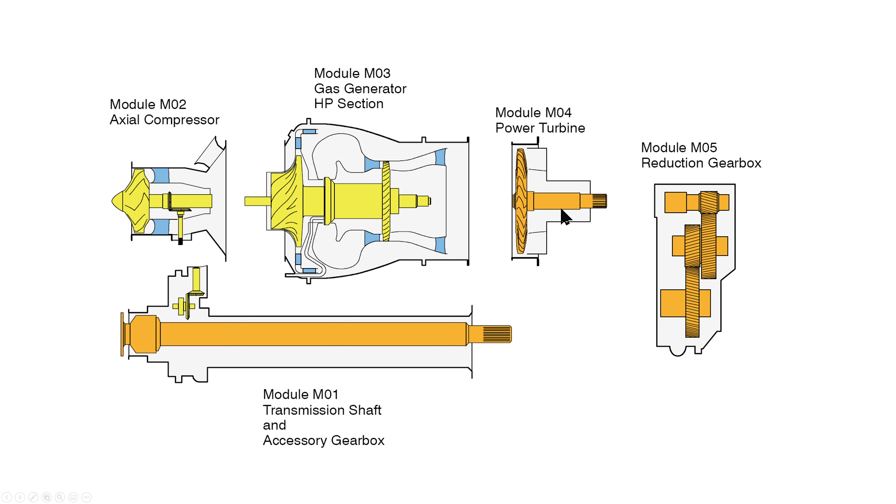The air that flows through here also goes to the 1/3, 2/3 rules. So 1/3 of the air that flows through this engine is used for the fire. The other 2/3 is used for cooling and pressurization and all kinds of other stuff.

So this is the bleed valve. When you've got your VEMD page up and you've got those white and green diagonal line boxes in the top left and top right corners, those are called your bleed valve flags. At startup, your bleed valve flag should be indicating that this bleed valve is open.

That means that some of the air that is pulled in by the axial compressor is not used - it's not sent back here at all. It is vented overboard; the engine does not use it. So that bleed valve is open so that the engine only receives the air that it needs.

But if the engine needs a high power demand, that bleed valve will close and extra air will be supplied back there to really ramp up the fire. But during engine start and for most of the operation in a D2, these bleed valves are going to be open.

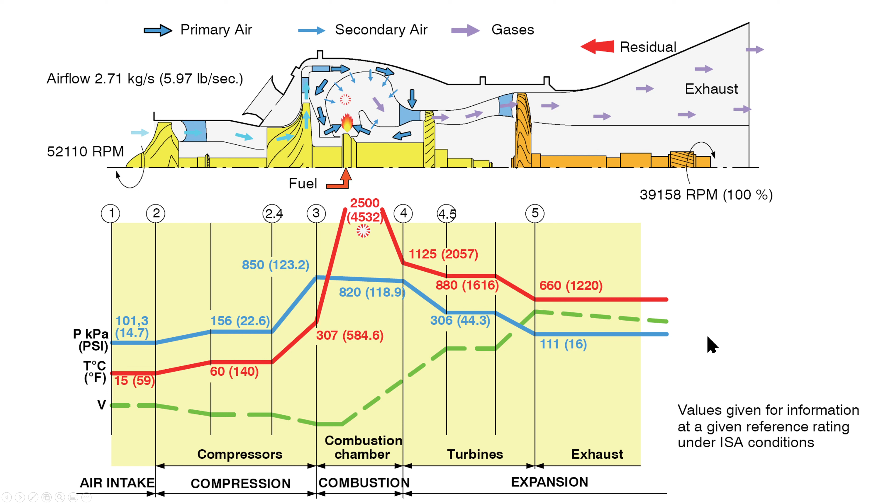We do have a little bit of residual thrust because you can see here that air is boogieing when it comes out of the back of that engine. So there's a very, very small amount of residual thrust that is created.

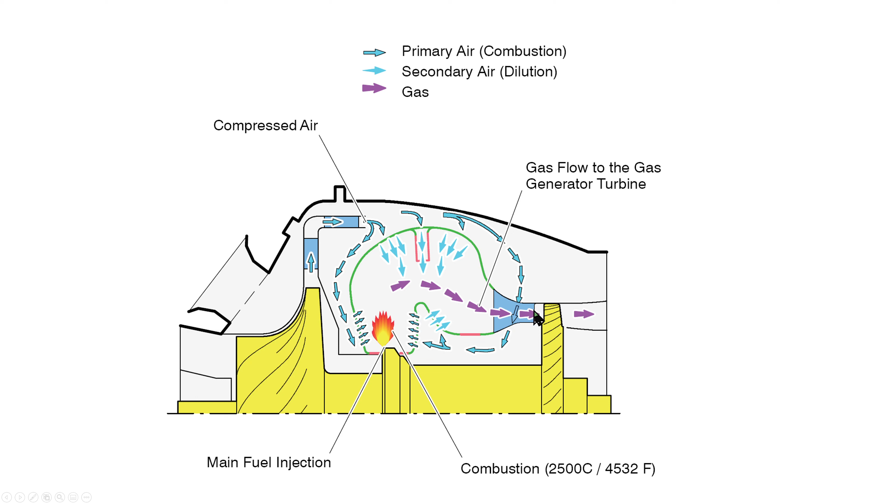This goes into a little more detail on the inside of the engine. We have our primary air that comes down here and feeds the fire. The secondary air flows in all along here and dilutes that air. And there you can see that primary air flowing through the inside of that stator.

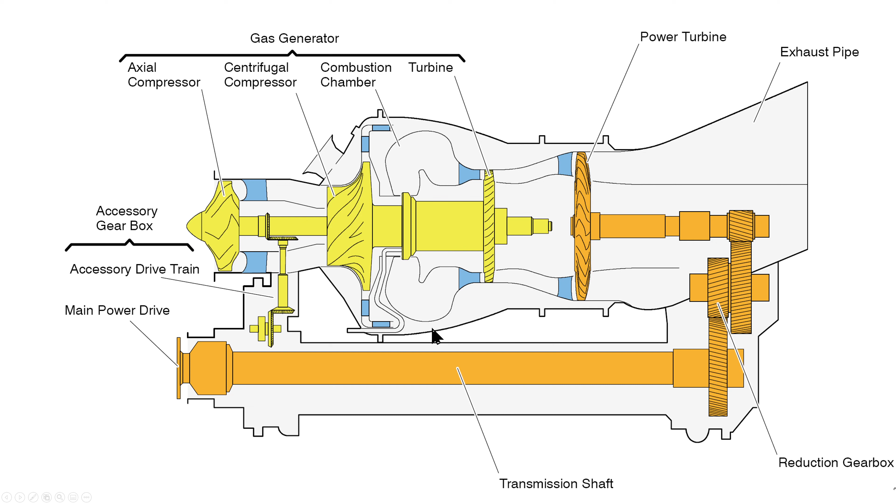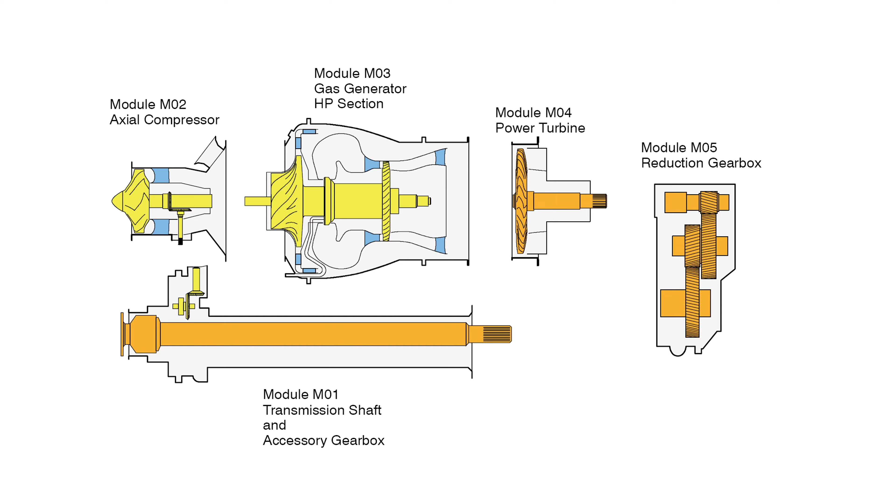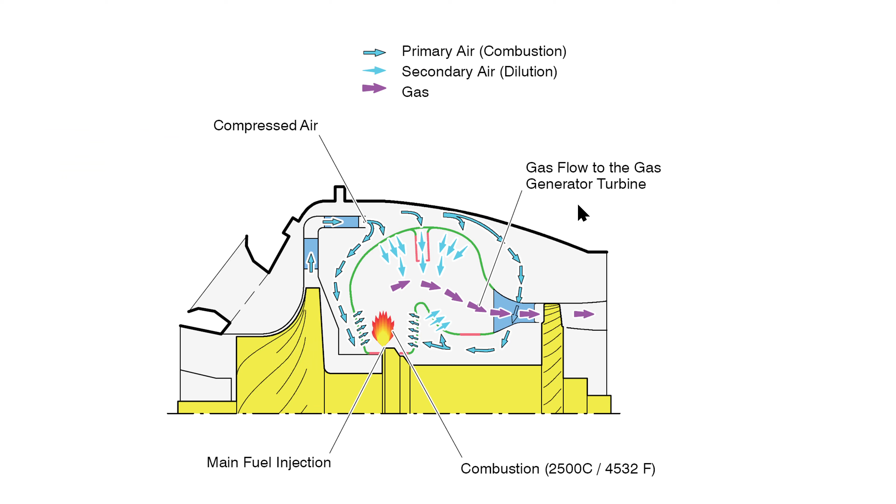I guess they're not going to show it.

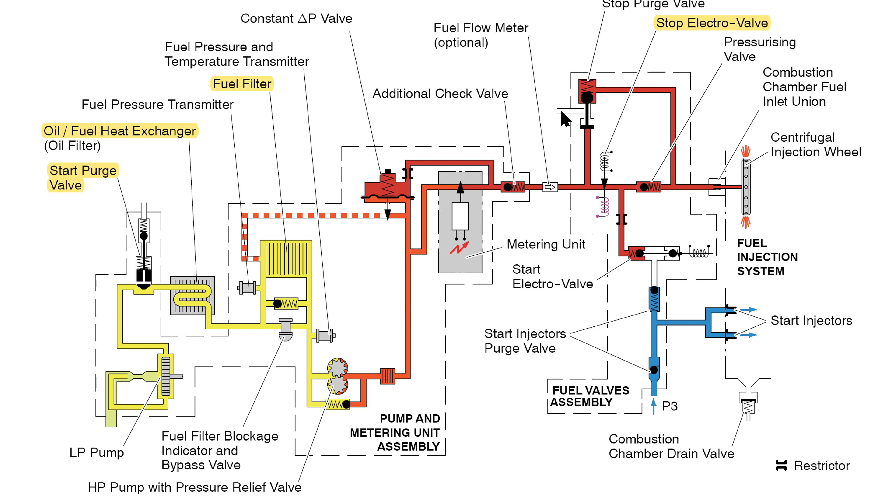That actually goes overboard into a can up under the engine. And then that can is pressurized during the next startup, and it blows it into the exhaust and burns it off so that it doesn't.

Some helicopters, you'll see when they shut down, instead of pushing this into a can, they'll just dump it overboard on the ground. So at engine shutdown, a lot of helicopters will just dump fuel directly on the ground. But Airbus is extremely environmentally conscious, so they dump that fuel into a metal can mounted to the bottom of the engine, and then it blows that overboard.

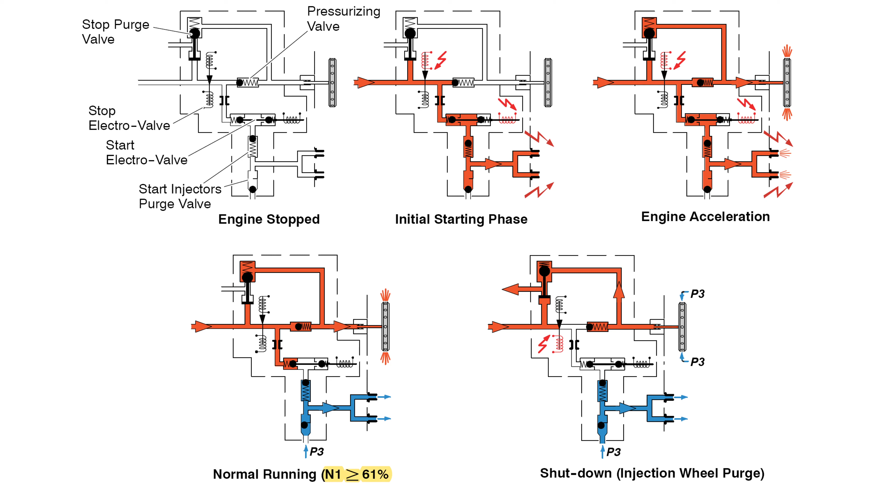Let me look at my notes here and see if there was anything else that I wanted to cover. I think that was pretty much it for now. There's probably going to be a number 2 on this because there's a lot of information that still needs to be covered on these engines, but this is the main portion of the mechanics of the engine. So you guys should have a pretty good idea how it works.